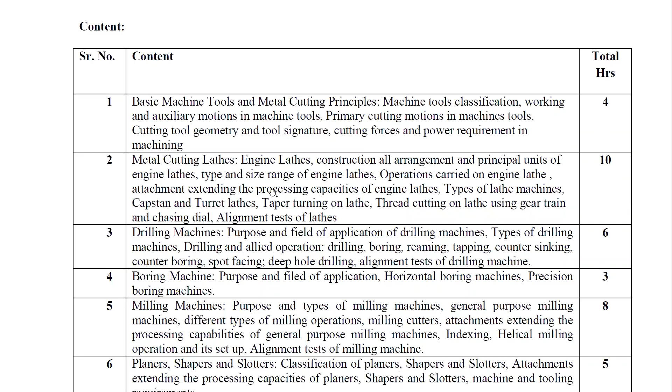Now there is the teaching scheme of this. There are total 3 lectures which I'll be taking, and 2 hours of practical, and the total marks, including theory as well as practical, is total 150.

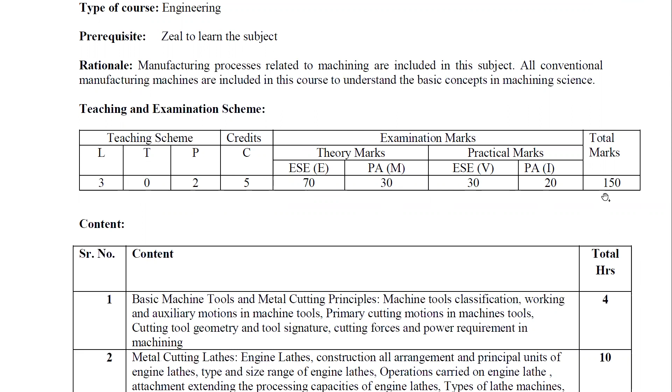Now, the first chapter is basic machine tools and metal cutting principle, in which you are supposed to learn about the basic machine tools and the metal cutting principles, and what is the classification of machine tools.

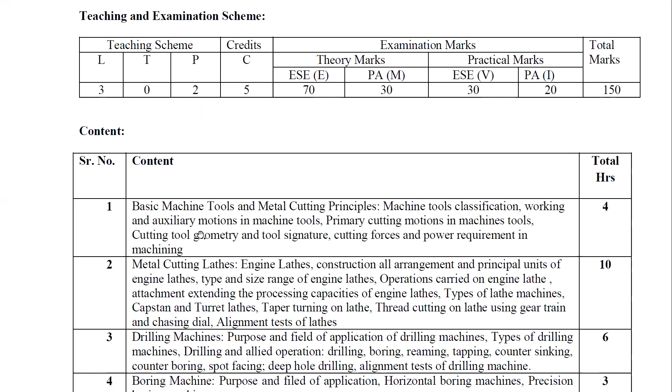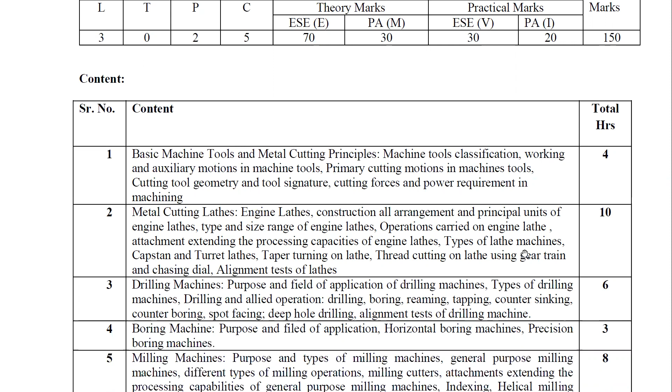In which you will study about the engine lathe, construction, arrangement and principal units of engine lathe, then type and size range of the engine lathe, operations carried out on the engine lathe, attachments extending the processing capability of the engine lathe, then types of lathe machine, capstan and turret lathe, then taper turning.

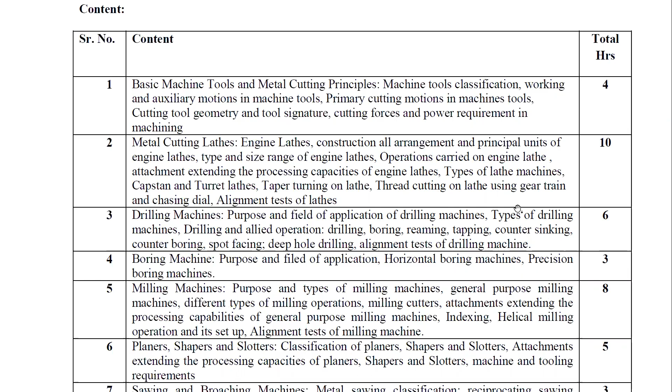Most D2D students will already be knowing about this. Then thread cutting on the lathe machine using gear train, chasing dial, alignment test of lathe. Total there is 10 hours.

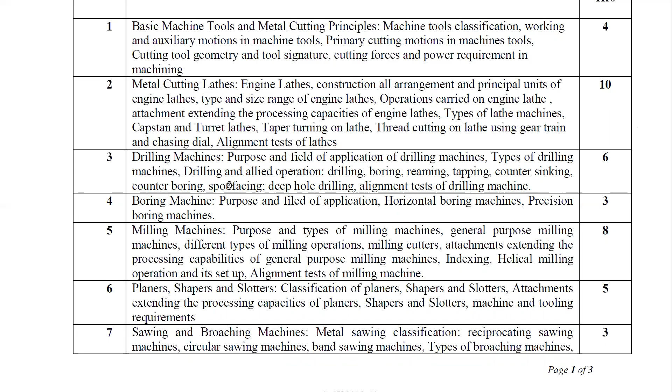Then there is boring machine. What is the purpose of it? What are the types? Horizontal, then precision boring machine.

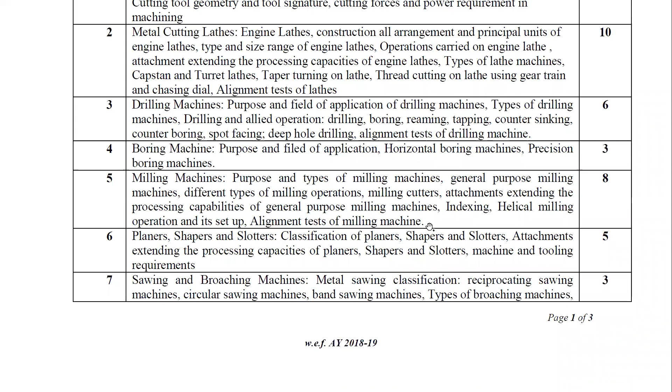Then a very much useful topic, that is the milling machine. Mostly milling operations are performed on CNC machines nowadays. What are the purposes and types of milling machine? General purpose milling machine, different types of milling operations, milling cutters, attachments extending the processing capability of the general purpose milling machine, indexing, then helical milling operation and its setup, alignment test - how alignment tests are performed in milling machine.

Sixth one is the planer, shaper, and slotter. You might be aware, in the workshop you have seen the planer machine, you might have seen the shaper machine, but planer machines are very costly and larger in size, so you might have seen them in industries. Same way applies for the slotter, you might have seen the slotter machine as well.

Then in this chapter you will study the classification, what are the attachments extending the processing capability of planers, then shapers, slotters, machine tool requirement, then sawing and broaching machines, in which you will study about metal sawing classification, then reciprocating sawing machines, circular sawing machine, band sawing machine, types of broaching machine.

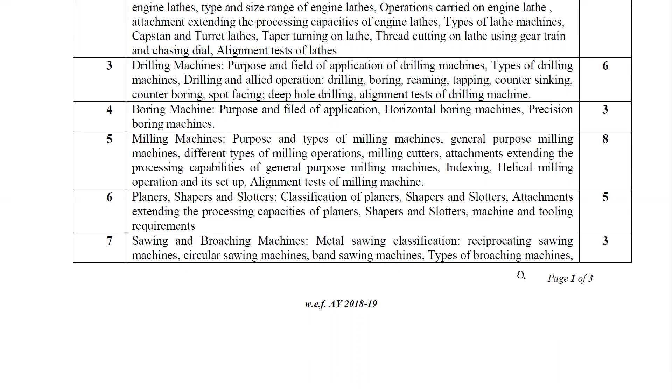Sawing you have seen in the wood bandsaw, where you might have seen the circular sawing machine for wood cutting. Same broaching operation is used for finishing as well as for cutting slots and grooving operations.

Then there is another topic, grinding. The last chapter is about grinding machines and abrasives, in which you will study about the classification of grinding machines, then cylindrical grinders, internal grinders, surface grinder, tool and cutter grinders, then centerless grinding.

So you will basically study about the types of grinders, then the types of grinding wheels, what are the wheel characteristics and wheel selection.

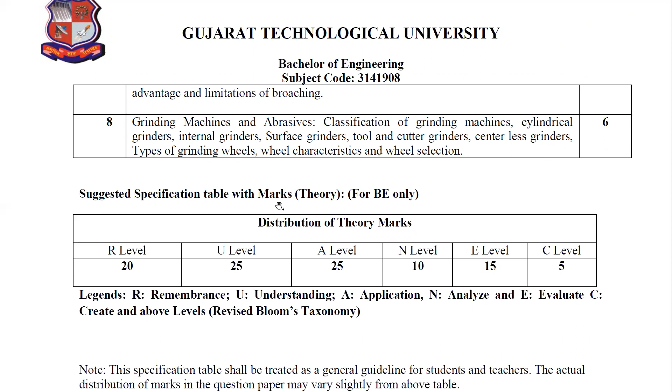Now here is the suggested specification table with marks.

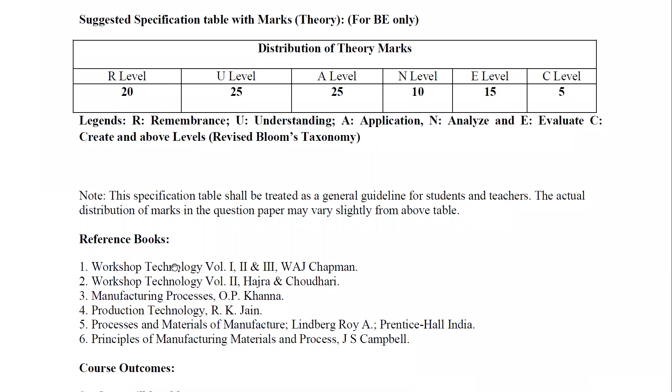Now these are some reference books you can refer: Workshop Technology volume 1, 2, 3, and there's volume 2 from this author. This book is also good, OP Khanna. You can refer this particular book, Manufacturing Process. Another good book is Production Technology by RK Jain. So one of these you can refer, either Workshop Technology, any volume, in which volume 2 you can refer, and OP Khanna. If you have this book, it is sufficient, more than enough for covering your syllabus.

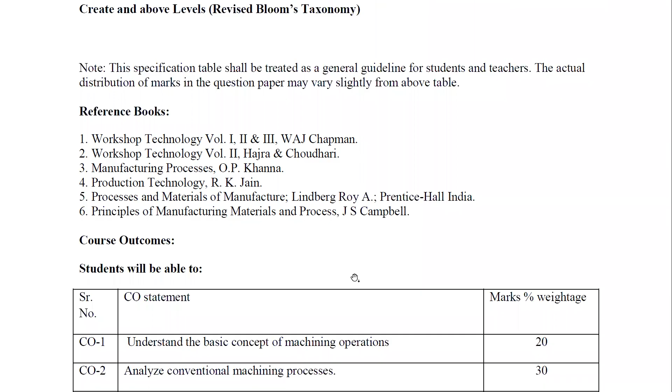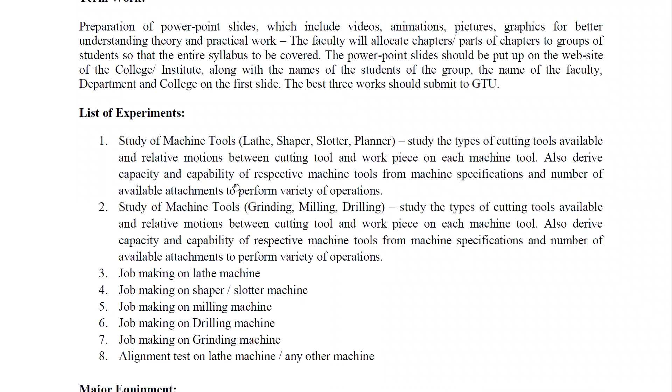Now these are the list of experiments. I will share with you the experiments. Total there are 8 experiments, in which the first experiment is study of machine tools: study of type of cutting tools available, relative motion between cutting tool and workpiece, also derive the capacity of respective machine tools from the machine specification, number of available attachments to perform variety of operations. So in the first one you will be learning about the study of machine tools such as lathe, shaper, slotter, planer. In the second, you will learn similarly about grinding, milling, and drilling.

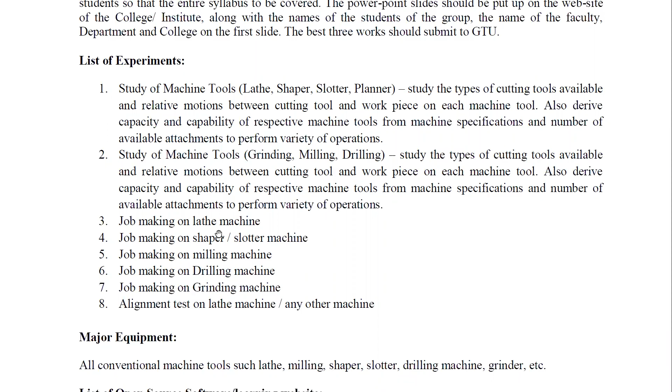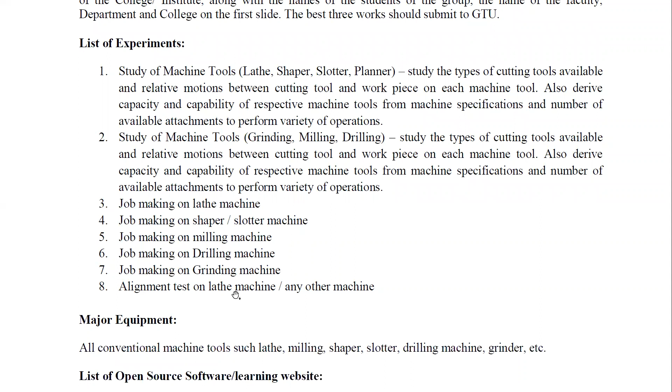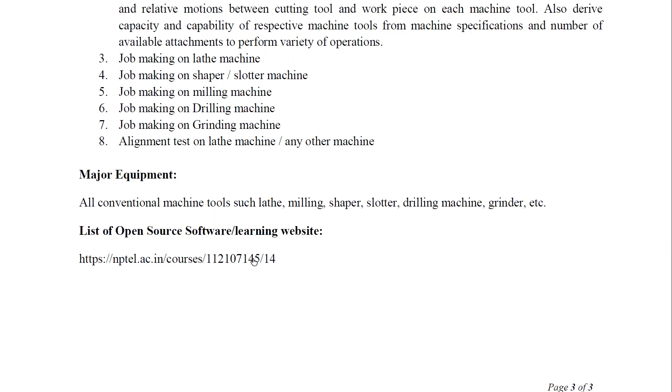Third is about job making, where you will have to make one particular job. Fourth one is shaper and slotter job making, then milling, drilling, grinding, and the eighth one is lathe machine. Now the major equipment required is lathe, milling, shaper, slotter, drilling, and grinder. You can also watch the lectures or some learning material from the NPTEL site.

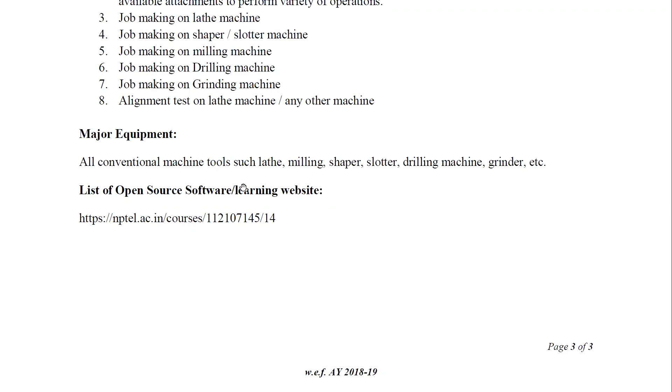So this is all about the syllabus. Now let us start with our chapter. The first chapter is basic machine tools and metal cutting principles.

Let me give a brief introduction about this subject: manufacturing has become increasingly important to engineers, supervisors, or labor involved in the production of different types of machines, equipment, or tools. So manufacturing process is mainly used to bring the metal and non-metal object, semi-finished or raw material, produced by means of different techniques to final dimension as per requirement.

If we see different objects around us, made from such as plastic, steel, or other materials, they may not be in natural or raw form. The objects are made by transforming the raw material available in nature into finished material as per requirement for useful purpose. This is known as the process of manufacturing.

So basically in the process of manufacturing, here is the process: there is input raw material, which is then converted or transformed in the transformation process. The transformation process involves manufacturing processes. Suppose there is one CNC lathe, and the input raw material is SS bar. Operations are performed on the lathe machine, such as milling machine, and you get the required output. So the transformation gives output as a finished product. Finally you get the output finished product from input raw material to output finished product. So this is about the manufacturing concept.

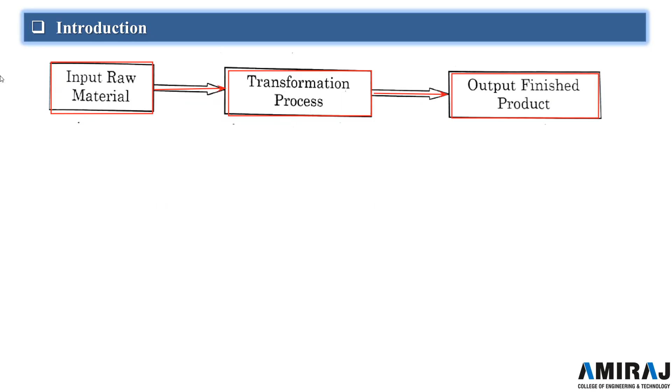Then the next one is how the manufacturing process concept works: manpower, material, machine, method, and money. These are the requirements for performing any manufacturing process to convert the material to output of a very specific product. The word manufacture is derived from the Latin words, meaning made by hand. But in the present context, manufacturing involves making products using various processes. Basically it involves six parameters: material, machine, methods, manpower, money, and the manufacturing information system or manufacturing process. So there are total 6 M's involved in the manufacturing process.

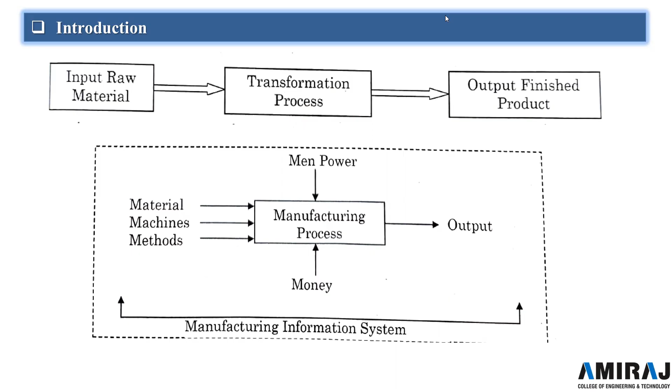Now next is about the manufacturing process classification, how the manufacturing processes are classified. The development of manufacturing is based on research in the 6M discussed earlier, and many new materials, methods, and machines are identified and developed in every economic product.

The various processes used in manufacturing are classified: the first classification is the primary metalworking processes, also known as metal shaping processes or metal forming processes, in which we shape or form an object. These processes mainly use a variety of techniques, making use of force, power, pressure, or stress like compressive, tensile, shear, or their combination, to cause a permanent deformation of material to give the required shape.

The primary metalworking processes commonly include: the first one is rolling, in which we roll the object or reduce its diameter. Then the second one is drawing operation, in which we extrude a particular part or draw wires.

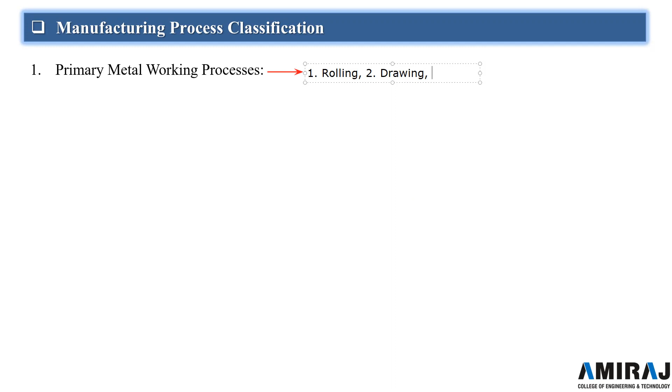If we want to make a wire, then that process can be used. Then there is forging operation. In forging, the material is reduced in size through a hammering operation, similar to the smithing process where a smith reduces the size of an object by hammering. Same way forging applies.

Then there is extrusion process, in which the part or object is extruded. Another operation is bending operation, in which the object is bent into the required shape. So these are some of the primary metalworking processes.

Then there is the second category, the machining processes. Machining processes involve removal of unwanted material in the form of chips during different types of metal cutting, by revolving or non-revolving workpiece or tools, from a raw material or raw piece.

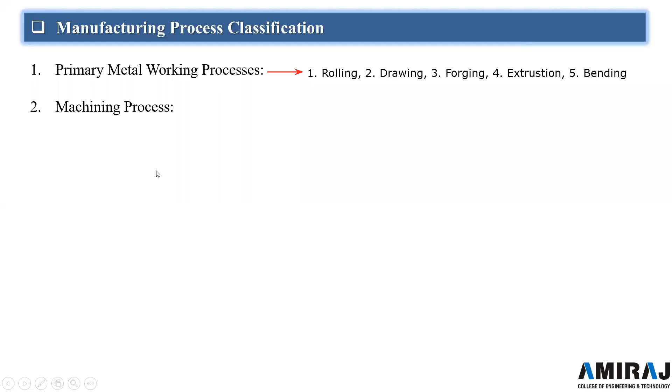So there are various operations involved, let me write them down. In machining processes, there are various types. The first one is the turning operation. Second operation is drilling. Third operation is milling operation.

Fourth operation is shaping, where you might have seen the shaping machine in the workshop. Then there is slotting. So in this subject you will study these machining operations which come in this category, while the primary metalworking processes you will learn in higher semesters in the subject metal forming analysis.

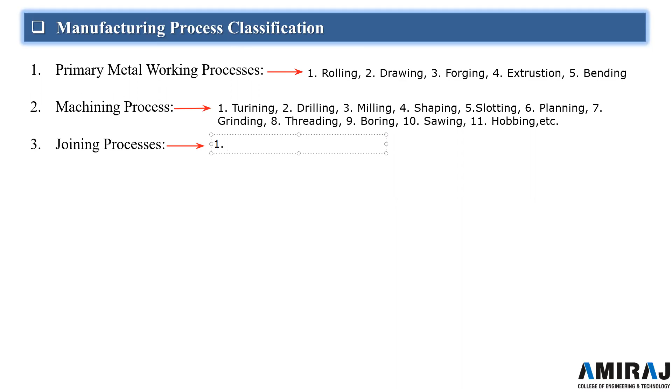Next, another type is the joining processes. Joining is the process of assembling two parts. The first joining process, which you know, is the welding process. Another joining operation is the soldering operation, which you might have done. Next is the riveting operation, which you might have seen how it is done - it is quite interesting.

Another operation is bolting operation, pressing operation. So these are the various joining operations. A few more I can name, such as adhesive joining, which also comes under the joining process.

Next in the manufacturing processes classification is the foundry processes. The foundry processes are basically sand casting and other casting processes. In casting there are sand casting, permanent mold casting, precision casting, investment casting, shell molding processes. Let me write these down.

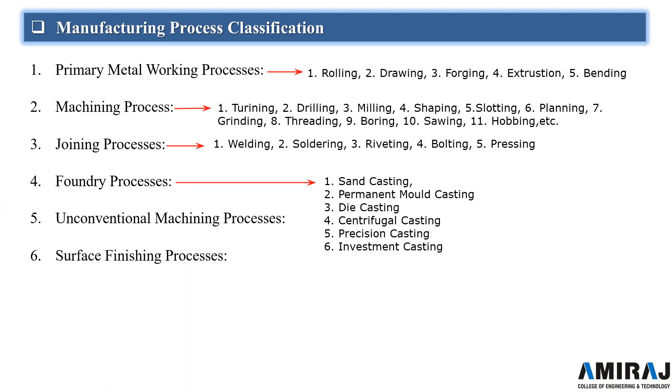Now next is, what is a machine tool? A machine tool performs the material removal operation with tools to produce desired shape or size of the component. Machine tools are machines on which the metal removal process is carried out, and this basic definition involves holding the workpiece, holding the cutting tools, and moving the machine tools or workpiece, or both relative to each other, which requires energy.

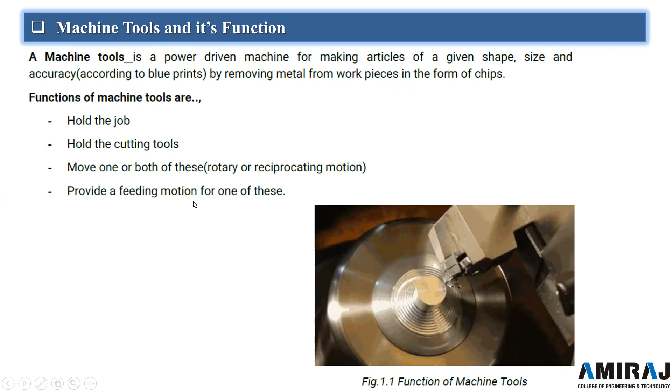So this is all about today's lecture. In this lecture I explained about the various manufacturing processes, a simple general classification with a brief introduction, and what is a machine tool.